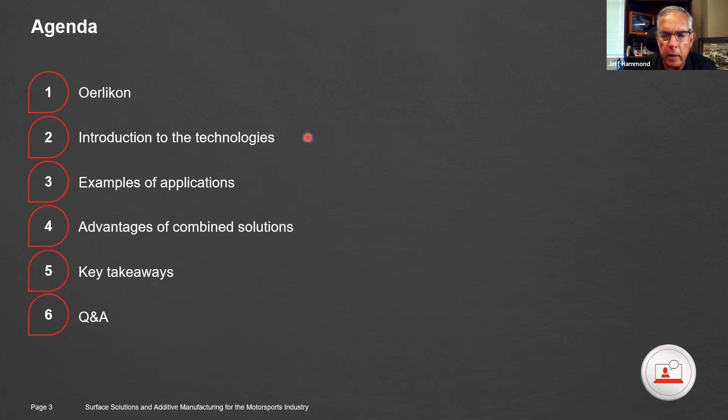All along the presentation, Jeff, if you have any questions, just interrupt me. Okay, we'll do that, and we'll keep an eye out for the folks tuned in. I think we've got some folks already eager to learn about what's going on here, so as we go along, if they throw a question out there, we may call a timeout and try to address it at that moment. Okay, sure, thank you very much.

A few words again, I'm not going to bother you with tons of numbers, but Oerlikon is a massive group composed today of two big divisions. One is what we call polymer processing solutions, which is more about fibers, yarns, non-woven products that you'll find in technical textiles or carpets, this kind of thing. We both manufacture the yarn but also the machine and the full automatization of the machine. But today we're going to look more at what we call the surface solution division.

In surface solution today we have different kinds of subdivisions and different products we can offer. The very first one is what we call Oerlikon AM, for additive manufacturing, so it's the 3D printing branch. Oerlikon Metco, as you can see in the picture, is more a coating division about thermal spray, thick film, I'll show you more afterwards. And Oerlikon Balzers, which is more about vacuum coating and thin film application. So today, Oerlikon Balzers, Metco, and AM cover a lot of different industries.

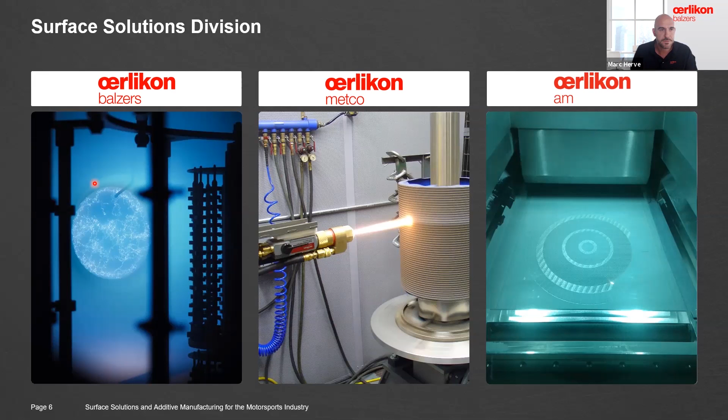It goes from aerospace, medical, the semiconductor industry, oil and gas, but here today it's really all about motorsports. When we look at the three divisions, Balzers, Metco, and AM, we're talking from diffusion or micrometers up to real parts. With the colleagues from AM, we'll talk about real, printed, physical parts that you can have in hand. With Metco technology, we start talking in the hundreds of micrometers up to millimeters, so I'll refer to Metco often as the thick film application. And for Balzers, we talk about thin film, only a few micrometers of coating that we apply.

I'm not going to spend more time on the company itself, but maybe you have a few questions already. I was just looking at what you're starting out with and what you're saying - make sure I'm following your lead - is that with the coatings you have, it could be not even enough to know it's there type coating, and you can build from that point and make it thicker. Now, is this an application we find with bearing companies that send stuff to you to have bearings coated so they could improve the wear as far as the bearing's concerned?

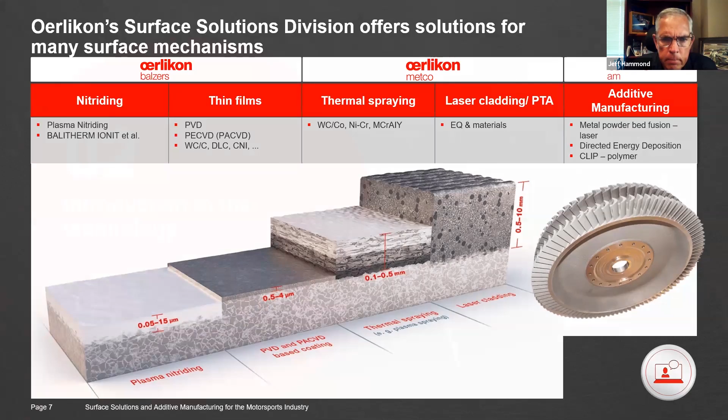Maybe I can go through the technology, and I'm pretty sure that's where most of the questions will come. Once again, keep in mind, I would say I'm more of a thin film specialist, so I'm just taking the lead for my colleague from AM and Metco. So don't be surprised if I say something wrong or not as accurate as I should be. But as with any product, any technology, there is not only one solution.

If we look at additive manufacturing, 3D printing, there's a lot of different technology today out there on the market. Most of the time, we found what we call metal powder bed fusion, where basically you have a slot with the powder, which is the material we're going to use to print the parts. Layer by layer, with a laser or multiple lasers, we're going to melt the powder and build the part itself. Similar technology is also what we call SLS - selective laser sintering. Both work on the same principle, that layer per layer, we build up the parts.

Other technology, or I would say even closer to the coating part you'll see later, is where basically you have the powder, and thanks to a laser beam, again we're going to melt the powder, the product, and then build up the part. Recently we also worked with technology that we call CLIP, which is mainly for polymer applications, where we combine the UV light with the resin in order to build up the parts.

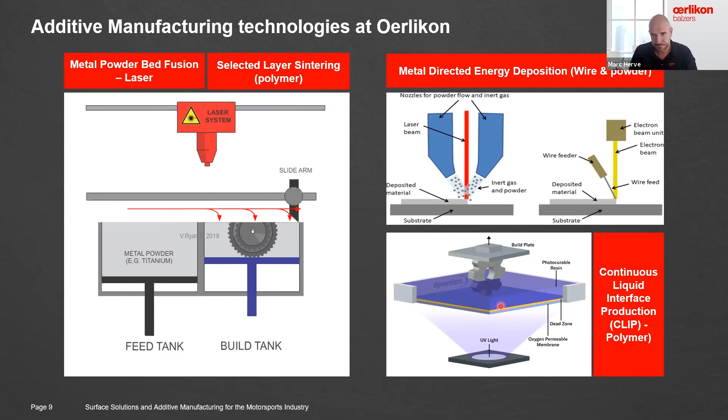One of the strengths about Oerlikon is that we work for the complete supply chain - from creating the powder, the material itself, down to making the design of the parts in collaboration with the customer, printing the parts, doing all the post-processing work including machining, heat treatment, surface finish, and then doing the full final control, both visual on the coupon and on the parts, with the quality standard. So we're not just a basic printing company - we can really cover the whole supply chain for this kind of application.

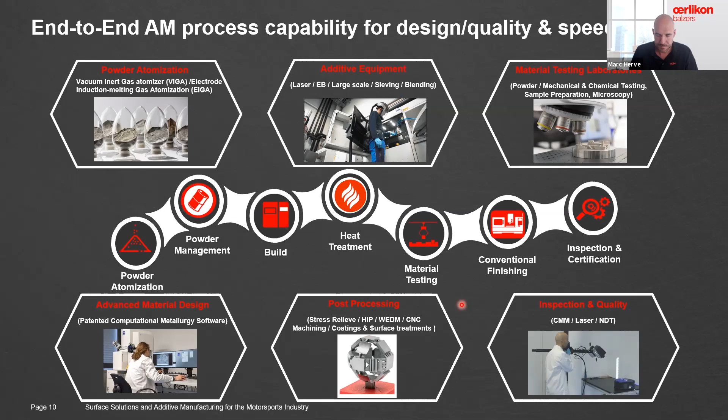So again, it's just to give you a quick overview of the technology. But here, AM again - complete supply chain, different materials, and definitely different sizes of machines depending on the needs.

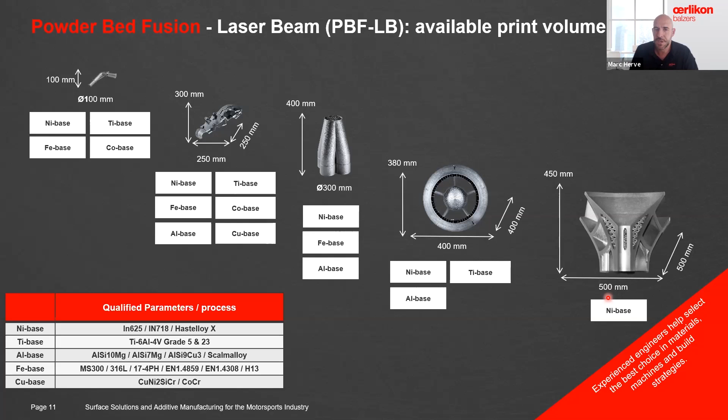If we move then from the parts manufacturing to the coating, really the coating. I'm going to talk now about the thin film, so more what we call the Balzers application. So again, think about it when we talk about coating. Most of the case with a thin film application, we are looking to prevent the wear and reduce the friction. So it means that 95% of our applications are really tribological applications.

So this is why before talking about tribology, just a quick reminder, what is a tribo system? A tribo system will be composed of two different parts that could be made of two different materials and working in a certain environment. This environment could be oil, it could be part of the engine, or it could be a completely dry situation. But sometimes, you can have particles coming from the outside. The engine won't work the same way if you're racing in the Dakar in the middle of the desert, or if you're on a clean track on the weekend. So all these parameters will be, let's say, the working environment.

And when you start applying pressure and motion on one of the two parts in this environment, you will create what we call the third body. And this is where the whole magic happens, the third body will be where you create the wear, the friction, the behavior of the component. So here it's a very basic reminder, what is a tribo system?

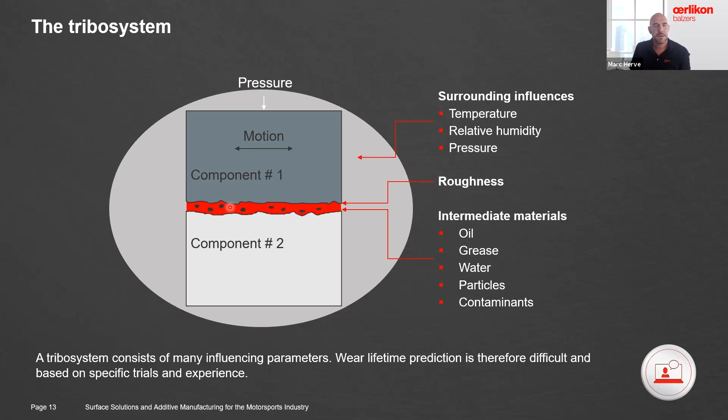The reason why I'm showing this is because when we talk about thin film, keep in mind, we are talking about a few micrometers thick. Surface roughness, surface finish actually matters because the coating is going to reproduce exactly the surface finish that we have before the coating. So if you get something shiny, highly polished, we do the coating, it's going to be the same afterwards. But if you get something which is very rough, the coating will just reproduce exactly the surface. So the risk is that at the end, you have your coated parts with high roughness, and the coating will keep all the high peaks of the finishing.

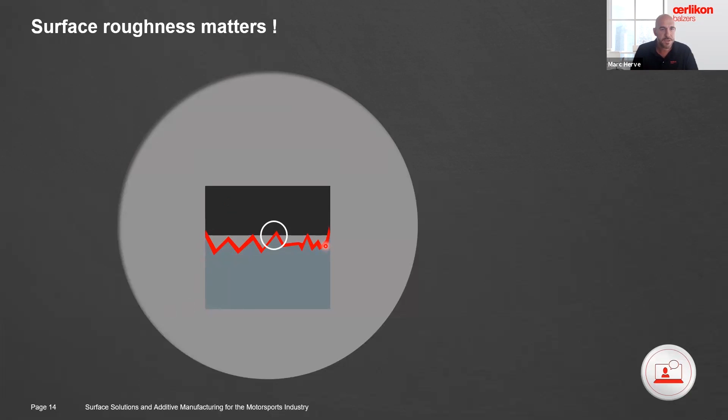So if we come back to our tribo system, again, two components, you start applying pressure and putting a little bit of movement. Many things can actually go wrong when you get your coated parts. One of the possibilities is that the coating being so hard on the rough surface, you start to be abrasive for the counterpart. So on one hand, everybody is happy, the coated parts get no more wear, but for the whole system, you still have wear. So no good.

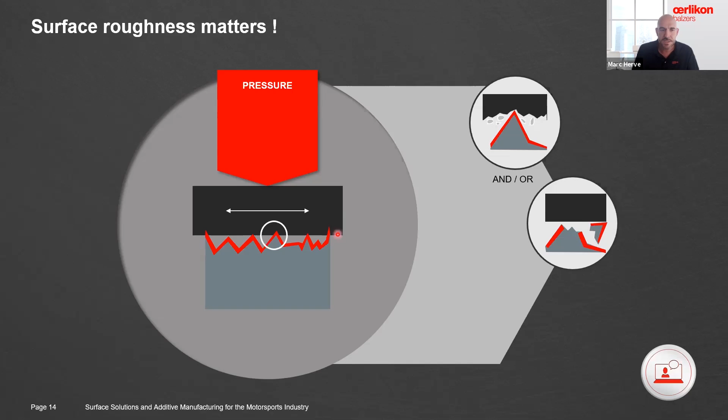Another possibility is that the counterpart is hard enough, leading to the fact that we're going to start breaking the peaks of the roughness, and suddenly you will have micro coated particles in your third body, and you will have wear because it's going to be very abrasive. Or third possibility, the counterpart is actually so soft that you will transfer this soft material to the coated parts. And suddenly you're back to an uncoated surface. So you don't have any benefits from the coating.

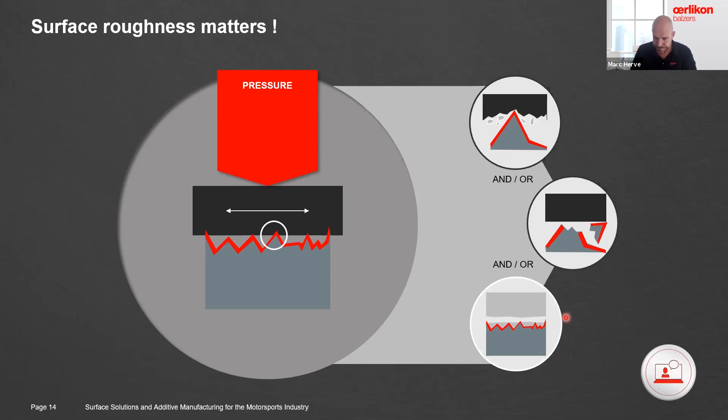So again, here is just a quick reminder that the coating is one thing, but the way you prepare the component before the coating makes a big difference at the end for the use inside the engine, for example, if we talk about motorsports applications. Okay. So about the coating itself.

Today, a lot of people are saying, oh yeah, I'm using a coating, I'm using a PVD coating. I don't know, Jeff, if you ever heard this kind of term, but many people mention PVD coating, which to a certain extent is completely wrong, because a PVD coating doesn't exist. PVD is in fact the technology that we use to apply the coating. And PVD stands for physical vapor deposition.

So basically the principle is that we take the parts, put them inside a vacuum chamber, and then we have different processes to make the coating. One of them is what we call sputtering. On the side of the chamber, we have big targets made of the material we want to apply on the parts. It could be a chromium target, a titanium target, almost whatever material we want to apply. The parts are put onto a planetary system to have a good uniformity of the coating all over the parts.

And then we create a plasma environment, and from the target to the parts, with the plasma and the polarization of the parts, we have a movement of ions from the target to the parts. And this is how we do the coating, to a certain extent. Here, with the sputtering technology, coating is made below 250 degrees C. So we can coat almost every kind of material.

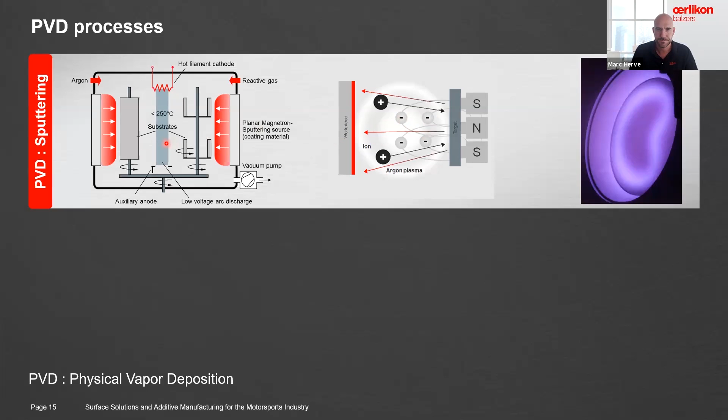Another technology which is very close is what we call the PVD Arc, where here in this case, we will again have solid targets of the material we want to apply, and we're going to create an electrical arc on the surface. And by doing this, we will have a very dense, very hard coating, but this process is made at much higher temperature, up to 500 degrees C. So we got to be careful about the material of the parts.

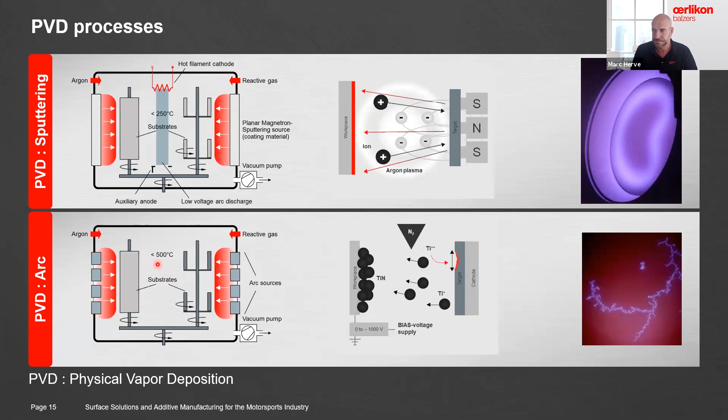Another coating or technology which is very well used is what we call the DLC. DLC stands for diamond-like carbon. So it's basically an amorphous structure between the graphite and the diamond. And this is why the DLC is very interesting, because it gives a very low friction that you can get from the graphite, but then the very high hardness from the diamond.

Here, the coating will be made again under vacuum, but into a complete plasma environment. And it will be then done at a much lower temperature. So for sure, below 250 degrees C, we can even go down to 150 degrees to coat aluminum parts, for example.

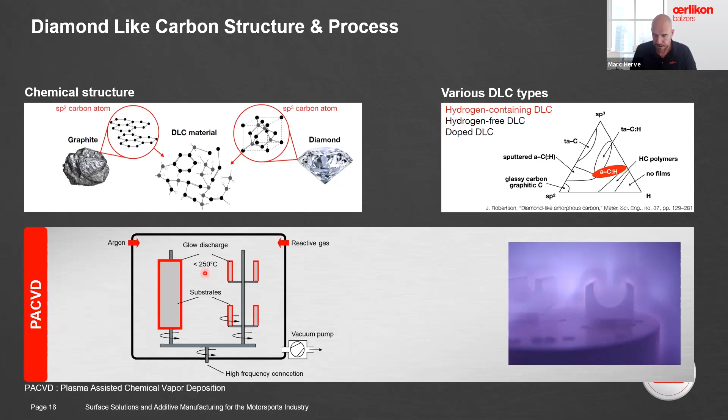DLC here, I'm pushing it really hard because DLC is probably the most used coating when we talk about valve train parts. But I really push that because DLC is not one unique coating. It's a really wide family of coating. And depending what characteristic you're looking for, we can adapt the coating. And today, Oerlikon Balzers has all the technology to cover all different families of DLC you can find.

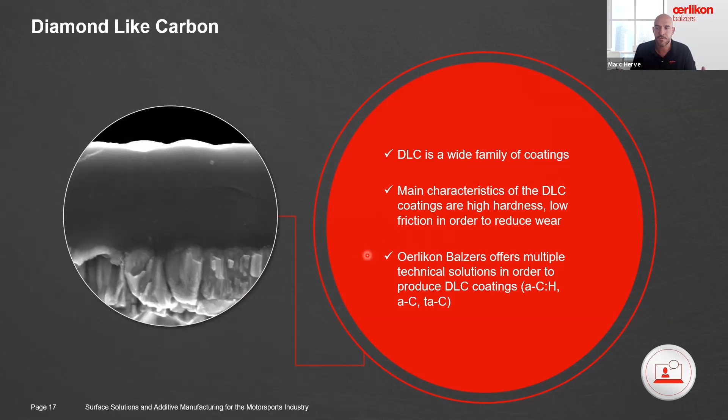But here I showed you different coatings, different technologies. Unfortunately, today there is not one coating for all. It doesn't exist. So depending on the application, the parts, the environment, we may have to go through different solutions, meaning also different technology. So if you look mainly for friction and wear, it could be a carbon base like a DLC.

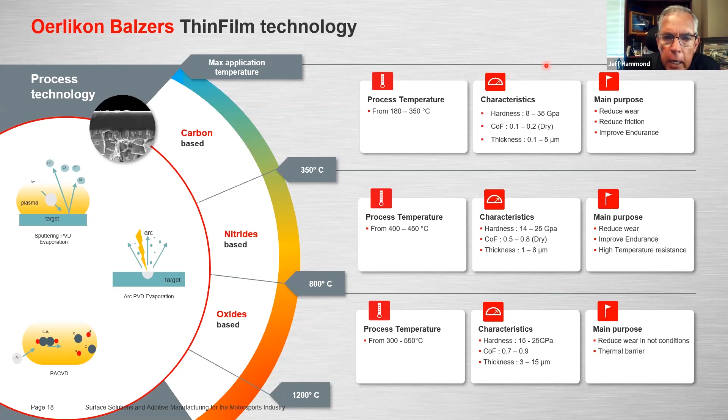Okay, we got another follow-up question here from John Damasowicz, and he's wondering, are there any machinability issues with any coatings? Again, 3 micrometers here in this case. Sometimes we coat parts which are not fully machined, fully finished. But for some reason, it's easier to coat the parts at a certain stage. So we apply the coating all over, and then some very specific areas are machined afterwards. And therefore, again, it's only 3 micrometers. So as soon as you get inside the material under the coating, machining will be almost as usual.

And the coating won't break. It's not because you're going to machine it that, where you're going to have the machining line, the coating will start to come off or whatever. Right. It will be a clean machine, clean line.

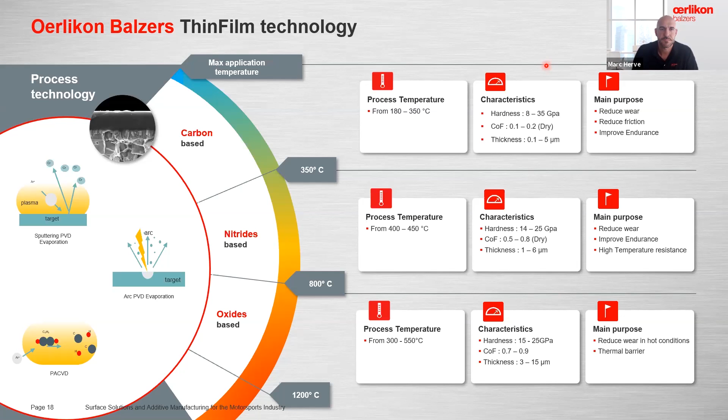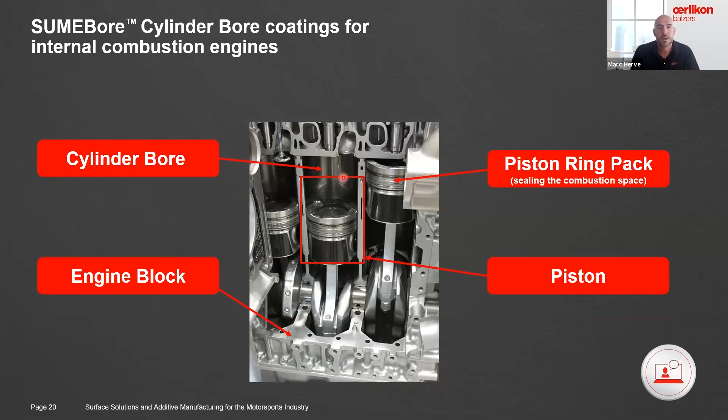Okay, very good. So let me move then to the other technology, which is more about the thick film coating. I know that there were already previous presentations about this technology in EPARTRADE, with the SUMEBore coating. SUMEBore is really a technology that we use specifically for cylinder bores. And here we are again on a completely different technology. So basically, we're going to use a torch, where with the torch, we're going to melt the powder and create this kind of spray.

So basically, all the particles, the powder, will be melted, and with the energy will be splashed onto the surface. So to use a reference from a colleague, all this kind of pancake design will be in fact the different particles of the powder melted, but with the energy will be stuck and piled one on top of the other. And depending on the powder, depending on the composition, we can mix different things with unmelted things, oxide particles, in order to give multiple properties to the surface.

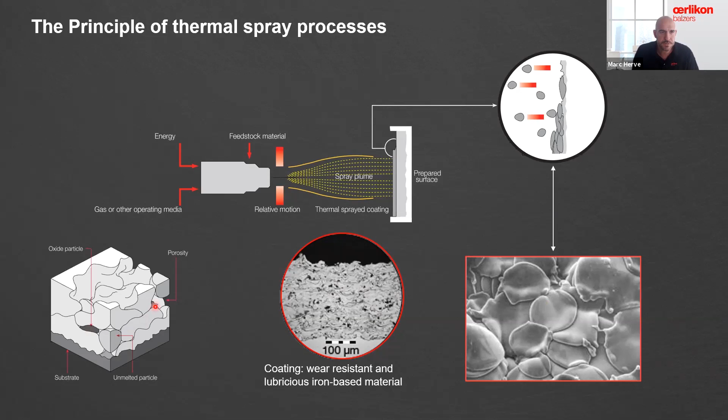So if we look specifically to the cylinder bore, the process will be that we will get the blocks or the specific liner, which will be slightly oversized. We will have to, let's say, activate the surface before, and as opposed to the thin film, where you need to be perfectly polished, actually here for the thick film, it's better to have a certain kind of roughness so that the particles get really embedded and melted onto the surface. So you prepare the surface, you pick the right material, powder, depending on the property you're looking for.

Then with a rotating torch, we're going to apply the coating on the whole liner. And finally, as you saw, with all these pancakes, the surface will be completely uneven. So by doing a final machining, honing, first you get the right dimension, and also you get the right finish needed for the application.

Okay, well, let's slow down right there for just a second, because this might apply to the question that came up. Sure. Your chart a moment ago, there was a large range of hardness of the carbon-based coating. This is coming from James. Yep. It would seem that there would be some benefit in choosing a somewhat softer carbon coating so it would wear into its mating surface. Yes or no, and then why?

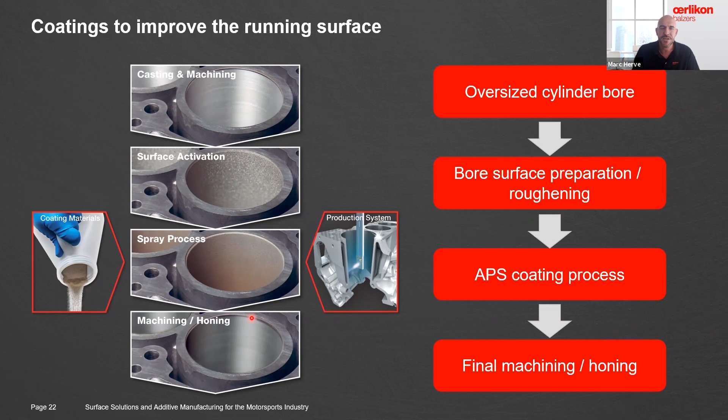And obviously they said thank you. But I think you're kind of addressing some of this right here in front of this. Am I wrong? So, again, the carbon coating application and here the SUMEBore, you're not looking for the same properties, but I will actually answer these questions in a few slides with an application, and you will understand. Actually I agree with him that sometimes having less hardness is actually better. But again, it is application dependent, and you will see it in a few slides. Fantastic.

So here, just to say, in the same spirit as for AM, what we do on the supply chain with Metco: here you can see what I was talking about in terms of activation, the preparation of the surface. Either we do it via machining, so you will really make this kind of geometry, or use a laser. And this way you increase the actual adhesion of the coating and the spray.

Our work is literally the thermal spray, and both on the activation or the honing, we work with a lot of very good partners around the globe, depending if you're based in the US or in Europe or in Asia. For example, in Japan, we are working with well-known, high reputation companies on honing, because we know it's a key part of the process. So here, really our work, but we can take over the whole supply chain from activation to honing, working with partners.

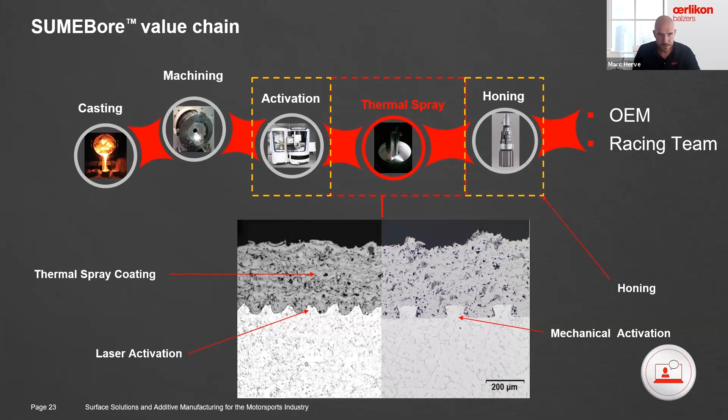All right, enough about the technology. Let me show you now some applications. So additive, it was very difficult for me to show a clear application, because the benefit of additive is that there is almost no limitation, almost. The big interest of additive is that you can go with very complex geometry. You can do things that you will never achieve with conventional machining.

The interest of additive is that you can combine different elements. With standard machining, you will have maybe 3, 4, 10 parts to compose one system, while with printing, you can print everything at once. You can play on the geometry. You can go with very thin walls, where again, it would be too risky with traditional machining. And with the range of material we can cover, you can really play in terms of thermal properties, making cooling channels on complex parts, for example. You can make parts based on copper, aluminium. There is definitely a lot of possibility and opportunity with AM.

When we talk about additive and motorsports, the interest is the speed. Machining a part takes weeks, literally weeks. And we know in motorsports, every day and hour is key. So by going with printing, you can be much faster than doing conventional machining. You can also combine, as I said, different geometry, be faster, complex parts. And this is really where the whole interest of additive is today.

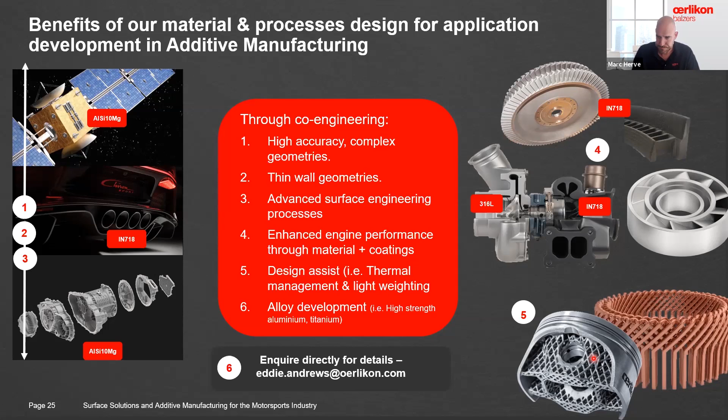Piston pin is probably now the most common application with a DLC coating. Applying DLC on the pin will give extra reliability because you get less wear, but it will also help you to get rid of the bronze bushing, for example, on the connecting rod. So first, you get rid of the weak part, and it allows you to change slightly the design of your connecting rod to save a few grams, maybe give a different design.

When we talk about the valve, depending if we talk about inlet valve or exhaust valve, we are not looking for the same properties. On the stem, whatever the case, DLC will be the best coating because we are looking for the lowest friction possible against the guides, the copper beryllium guide in most cases.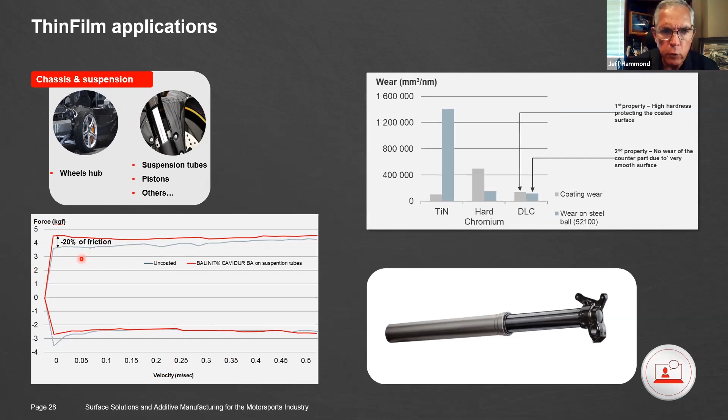Okay, because the reason why I was saying that - I was thinking if you're reducing the friction, most times when you reduce friction, you reduce heat between the two parts. Agree? Okay. But here on the suspension, we're not talking really about heat, though I agree that on the valve train, sometimes it will have an impact. I completely agree with that. Okay, thank you. You're welcome.

For the thick film application, we talked about the SUMEBore coating before on the liner, but there's a lot more application depending on what you're looking for. We can look for more thermal barrier process and application, for example on the head or on the piston crown - there's a lot of possibility.

So the SUMEBore is really on the inside of the liner. And for very severe applications, we can do the coating also on the inside of the connecting rod to be less abrasive. There's a lot of things on the engine where we can apply the coating. But again, between the thick film and the thin film, I'd say these coatings are not really in competition - they are more complementary, simply because they have different properties today.

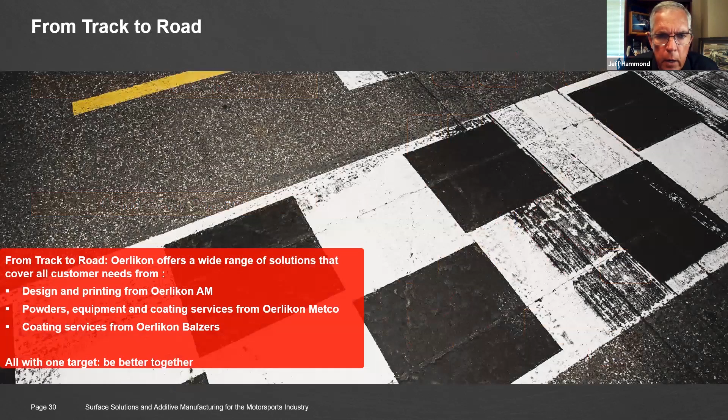Okay Marc, we have another comment here - sure, you were talking about all the different varying parts and pieces. But from your comments about surface finish, would you recommend an REM finishing prior to the DLC coating on gears?

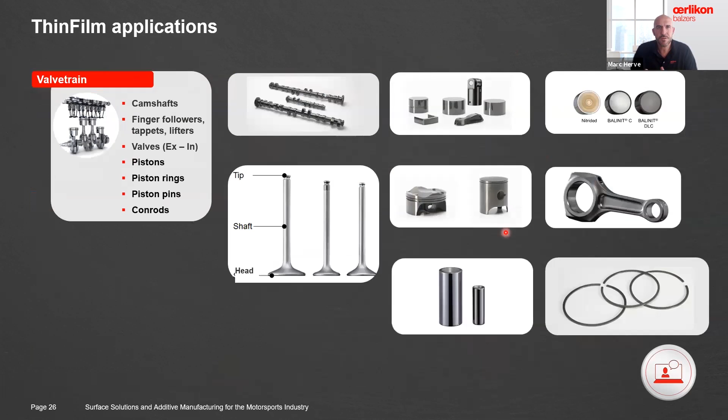All right, let me come back to gears. So we know from the industry that the REM finish is giving great benefits, because once again, by applying the REM finish, you get rid of all the positive peaks of the roughness, and therefore you get a better contact, and therefore you get better performance.

You don't change the wear and pitting effect just by doing it that way. You can postpone it, but after a certain time, you will still have the wear and the pitting. So having a REM finish plus a coating on top is definitely a possibility. The coating will act like it freezes the status of the part, keeping the nice, smooth finish you get from REM finishing. We've also seen in many applications that doing a microblasting prior to our coating, in this case what we call BALINIT C, gives very good adhesion and behavior, because BALINIT C is not as hard as a DLC coating. So yes, we can coat on top of a REM finish part, but for gears it's not the only solution.

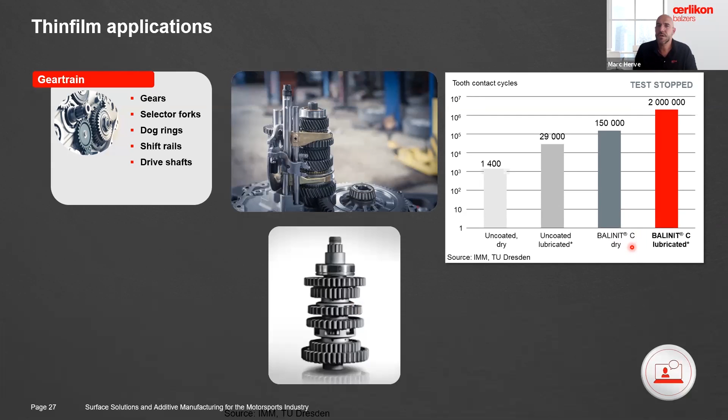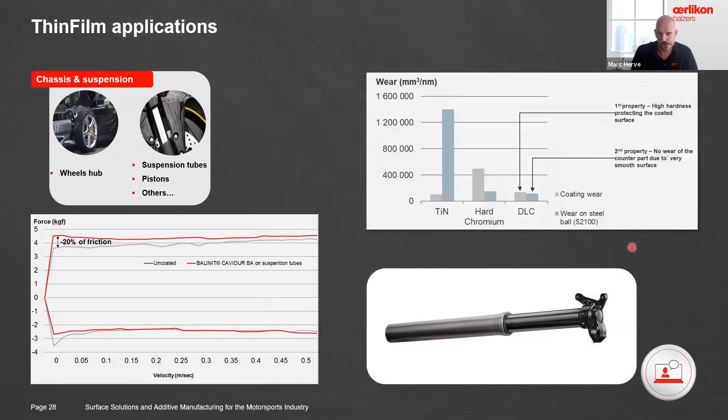One thing I should mention is that today many of the applications we coat have been upscaled for many uses. This is why we talk about going from track to road. A lot of coating we applied for racing applications is now used on road vehicles, motorbikes, sports cars, supercars, these kinds of things. A lot of what we developed in the past is now also used on the road. When you look at some supercars on the market today with 1,000 horsepower, the level of load is really incredible.

So you need to look for similar solutions and performance to what you get on the racing side. This is why at Oerlikon we coat everything from one single part to applications where we coat almost 1 million parts per year for road car applications. It's just to say these applications aren't only for high-end racing with top-notch budgets. Coatings today can really be applied at any level, as long as you want to push the limit.

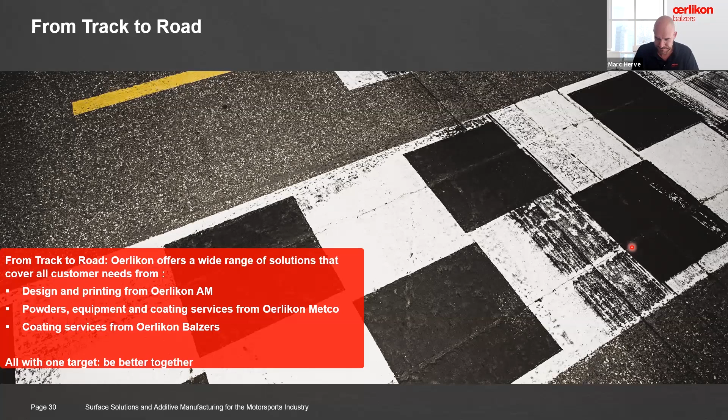One of the good things about working with Oerlikon is that with all the different technologies we have, if we come back to the pistons area, you can look at Oerlikon AM working and designing pistons and printing the pistons. Then with Balzers or Metco, depending on what you're looking for, we can apply the coating on the piston itself. Then we coat the piston ring with, again, a different solution. And then it works against a SUMEBore-coated liner.

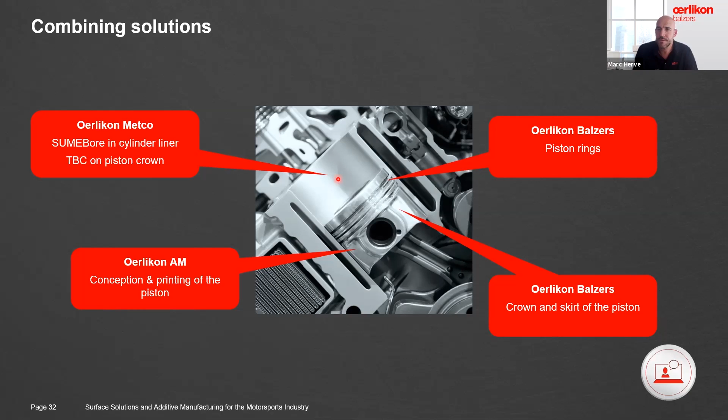So it's true that today, working with Oerlikon, we are looking to combine solutions. Right now we're actually working on a big project finding the best combination between coating on the piston ring and coating on the liner, in order to get the lowest friction possible and the lowest wear. This is not possible with other companies. If you want to do that with another coating company, you would have to talk to one company for the ring and one company for the liner. Here, you only need to talk to one company. This is really one of the strengths of Oerlikon at the moment.

If you have to keep something in mind after this long presentation, and sorry if I've thrown a lot of details and information today, Oerlikon is definitely a global supplier. For some applications, as you saw, we work from designing and manufacturing the powder and the equipment, down to manufacturing the parts and putting on the coating. A big strength is that with everything we have, both in manufacturing parts and the different coating technologies, we can cover almost any kind of solution, keeping in mind that the only goal is always to increase performance. This is the heart of motorsports: how to do more, better, faster, all the time.

Most of the time we consider ourselves a design element, so that when you think about a new application, you start thinking immediately about the coating. We will support you and help you a bit with the design, the surface finish, and what are the best conditions to apply the coating or how to design the parts. We really want to act as a partner in the design of the parts and the application, instead of just being an extra supplier on the list.

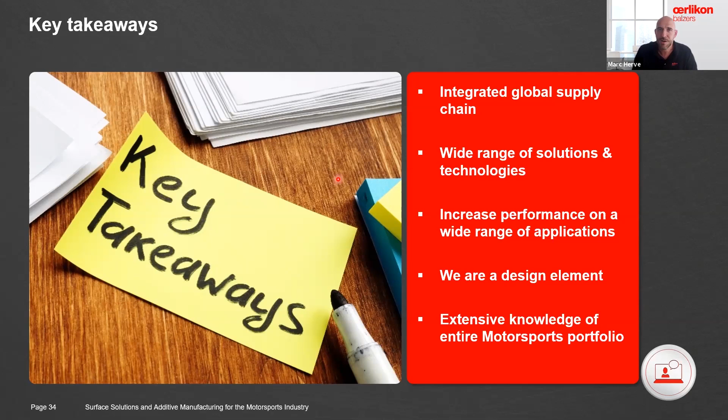It sounds like that for sure. Question right now for me is, where is your base of operation? Are you located in other countries, or is everything pretty much in one spot?

No, today if I look to Europe, this is where we've got the most centers for DLC and engine parts. Most of the things are done in France, but we also have a lot of application that we do in the UK, Germany, Italy, Austria, just to name the biggest ones in Europe. In the US, we've got 2 facilities today. One, for example, in South Carolina, in Rock Hill, and then we've got Elgin in Illinois, which are both doing the coating for the motorsports industry.

But then we've got plants in Japan, and we've got several plants also in Asia and South America. But for the motorsports industry, it's really the few countries I told you in Europe, 2 plants in the US, and then 1 factory in Japan, where we've got the biggest knowledge.

Well, that's good to know. I can just run right down the road. Rock Hill is only about 35 miles from where I'm at right now. So maybe I need to run down there and take a look at it firsthand, because it does intrigue me the way your company is approaching all of this.